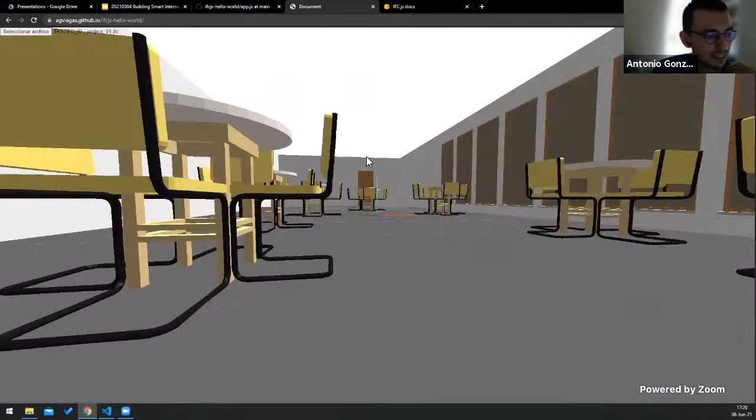We can see how this application looks if we go here in GitHub and click here, you will see this is how it looks. Obviously this is super simple because in 100 lines you don't have a lot of space to create menus and so on. But if I select a file here and open, say, a simple file, you will see that it loads super fast and we are able to see all the geometry.

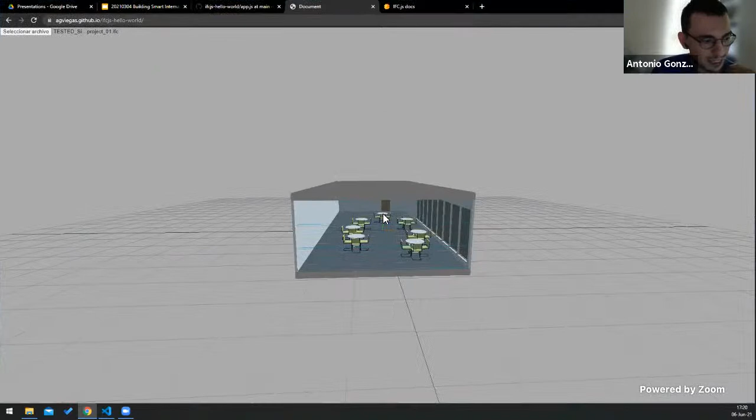Later I will show you how to access the data of all the elements we are loading. But this is fully working in Google Chrome. Right now I have made Google Chrome a BIM application, like Revit or BIM Vision or anything, and you can change this, you can adapt this. You can take this 3D view and put it in your page, show that to your clients, or use this to build your own platform that has a 3D viewer. And this is what it takes, only less than 100 lines of code.

If you take a look at this code, you'll see it's a super simple code. It's using Three.js, which is another JavaScript library a lot of people use to create 3D worlds in the browser. It's simply something you can use and have 3D right away without having to worry about the low-level details of building 3D in the browser. You can create 3D without this, but it would take thousands of lines of code. Using this is super simple.

If we take a look at the code here, you'll see the only thing I'm doing is importing Three.js here, a couple of objects. I am importing the controls, which is the object I use to move around the scene. And I am importing the IFC loader.

One thing to bear in mind is that IFC.js—we have merged IFC.js with Three.js so that now we are part of the Three.js library. This doesn't mean we only work with Three.js. You can use IFC.js separately. If you have your own 3D engine, you can use the core separately. But because we have the code, we have given that to them, so now you can use IFC.js directly inside Three.js. This is simply an implementation detail, but keep in mind that we are part of Three.js as well.

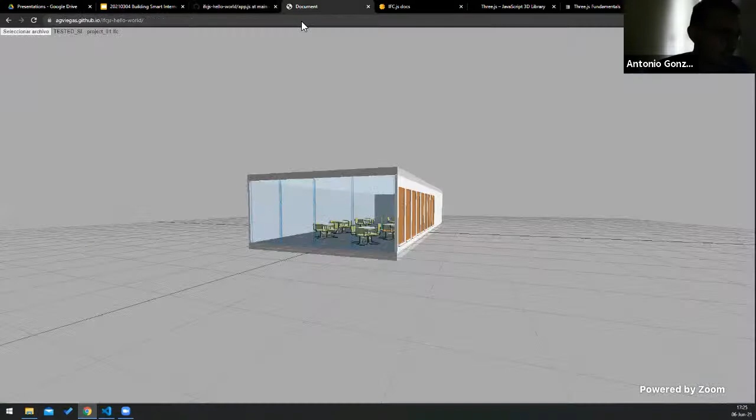I create an input element, a simple HTML input element, and I add an event listener so that when I upload a file, I create the URL object of that file, and I load that inside the scene with scene.add geometry. And this is it. With only or less than 100 lines of code, you can have a fully functional 3D viewer that shows your building.

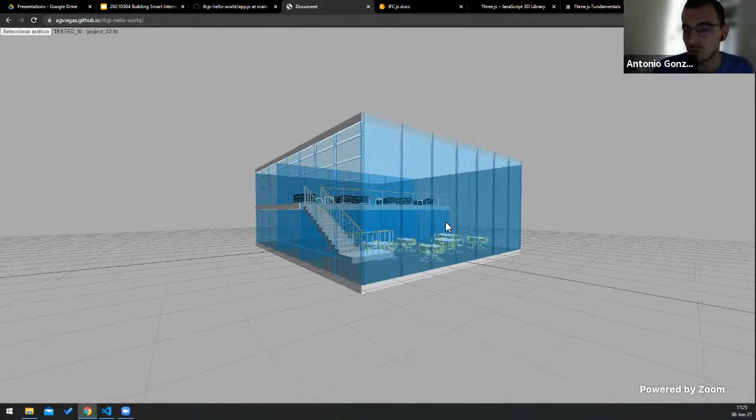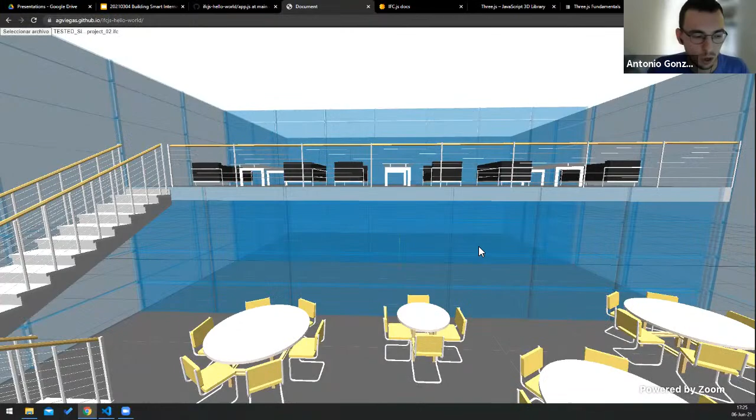And obviously, you can load any file you like. We are working to make this compliant with the whole IFC schema. There's still work to do. I won't lie to you, this is a project that has been going on for some months. I think the birth of this project was in 2020. So it's super young, super new, but we are super happy with the progress because we are able to load a lot of files. And even big files, and still have 60 FPS, which means this is also valid for applications where you need to load bigger IFC files.

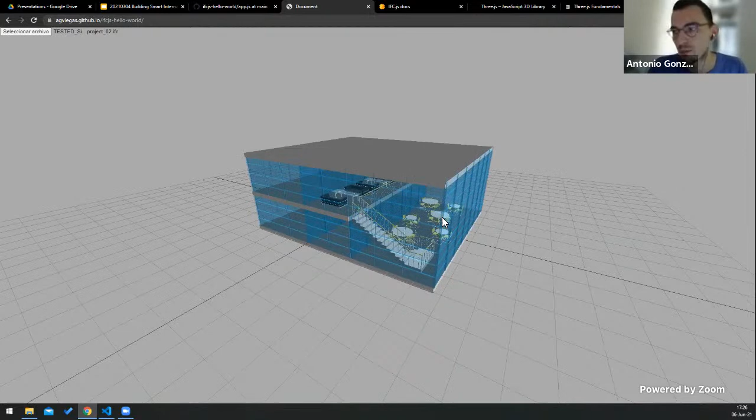And up to that point, you might be wondering, okay, you're able to load the models, but I want to access the information or the data, because BIM is model, but also information. And again, because this is something so new, this is something I did, I think, last week. So it hasn't been committed yet to the library.

You can find that if you go to GitHub, and go to web IFC. Yeah, web-ifc-three. This repository contains the IFC loader for Three.js, and here you will find the latest changes that we make. The problem is that every time we make a change, it takes 1 month or so, at least some weeks, for Three.js to reflect that change.

So if you follow the tutorial that we have and try to make what I'm going to make right now, it might not work. But the reason for that is that if you go to Three.js, and go to pull requests, and then closed, let's see, yeah, here you see that this has been recently merged. And this means that it will go out in the next version, but it's not there yet.

Just in case you try to follow the tutorial and say, hey, it's not working for me, the property showing and everything I'm going to show now, because it's super new.

So yeah, here in this folder, but the code that I have here, actually I can show you that. Let me delete that, and show you. Imagine that you want to replicate what I'm going to show you now. Like, hey, I want to see that as well. Let me try that again. I mean, imagine that you want to try IFC.js.

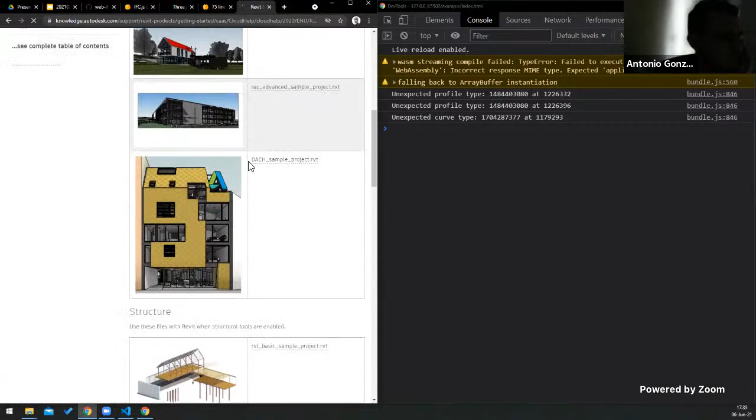If you go to Revit sample project, you can get this building here. You can download that building and export it to IFC. This is the building I will be showing now.

And yeah, it's here. And here we have functionalities to be able to see the properties of elements and also to access the whole structure of the IFC.

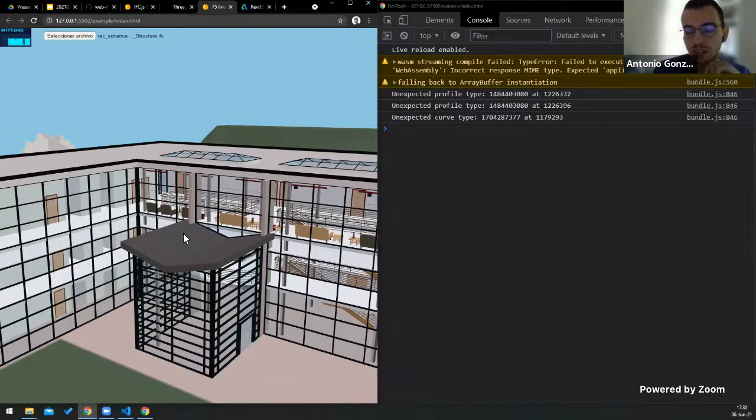So if I double click on something, in this case I was testing logic to make things transparent. So this is the reason why this is getting blue and transparent. But this is something you can customize however you want. You can make this opaque and red, or transparent and green, whatever you like.

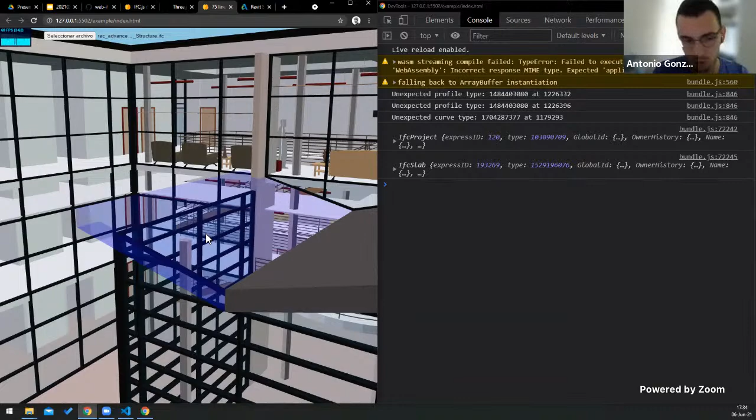And here, notice that in the code, I am showing two things in the console: the properties and the structure of the project. Every time I click on something, I will log on the console the IFC project and the properties. So let's see how that looks.

If I magnify it, you see that here we have the project. And if I open this, you see all the properties of the project.

And not only that, you also see that IFCs have the IFC project, then they have the IFC site. And here you have the IFC site. Again, I can go below the level and I can go to the IFC building entity. And here we have 1, 2, 3, 4, 5 building storeys. And each storey has the children of the objects it contains, like the ground floor.

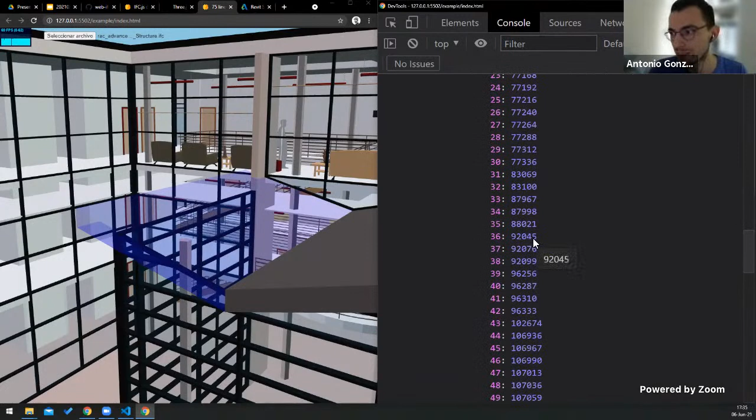For example, this is the entry level. It has certain objects, which are these objects, and these are the IDs of the objects. And I can access the properties of these objects if I want to, because again, this is one line of code, get spatial structure, and all this information is given here.

Or the properties, get item properties. If I see the properties here, in this case it's an IFC slab. And here we don't only get the direct properties, we also get the property sets, the types, and the indirect properties. In this case, get item properties, comma, all true. If the second argument is true, it means I will also get the property sets of the element.

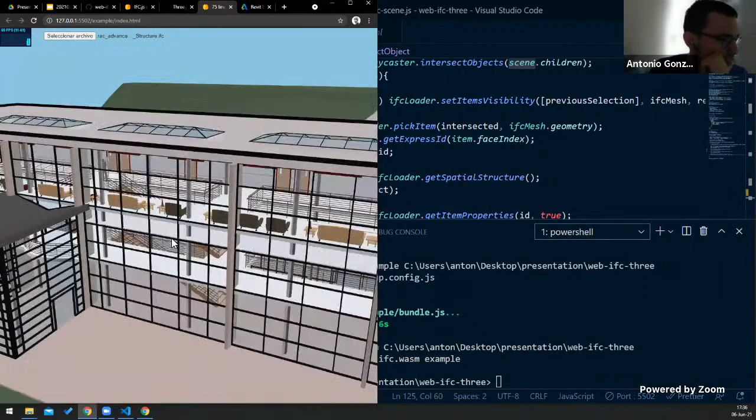Let's update that. Again, it shouldn't take much because it's not a lot of code. But if we go back here and I reload the same building I was showing you before, we should be able to go to an element. It can be any element, like for example, let's take this thing.

I've taken that. In the console we see IFC railing, and again here you see that we have two property sets. I can get into those property sets and see, if you have 100 property sets with the quantity data of the object or the material or whatever, you get that information here.

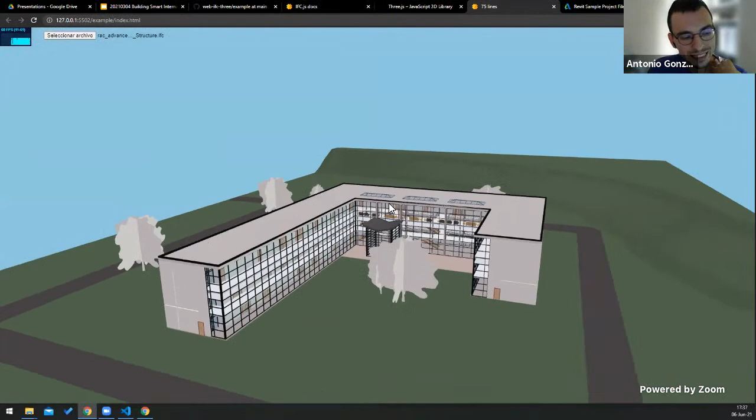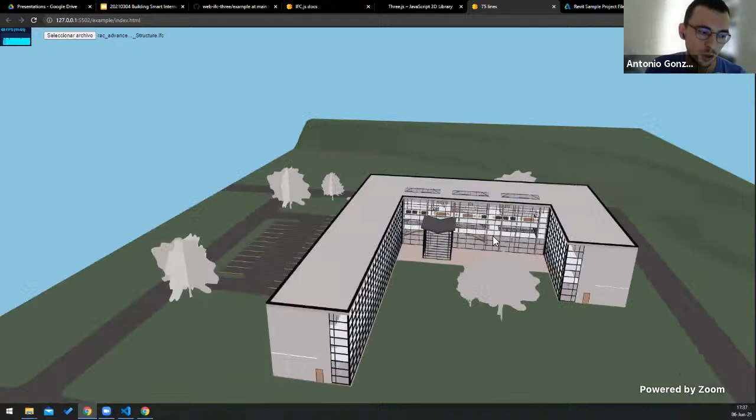Obviously, the point of all of this is not this application, because if you take a look at this, it's super simple. But the point is that if tomorrow you want to develop a BIM viewer in your platform or on your web, or if you want to start a new BIM application — imagine you're an expert in structures or whatever, and you realize you have the knowledge to build a useful BIM application, you can do that. You don't have to worry about the 3D or the IFC, because using IFC.js you get both things right away, and you can only focus on what adds value to your business.

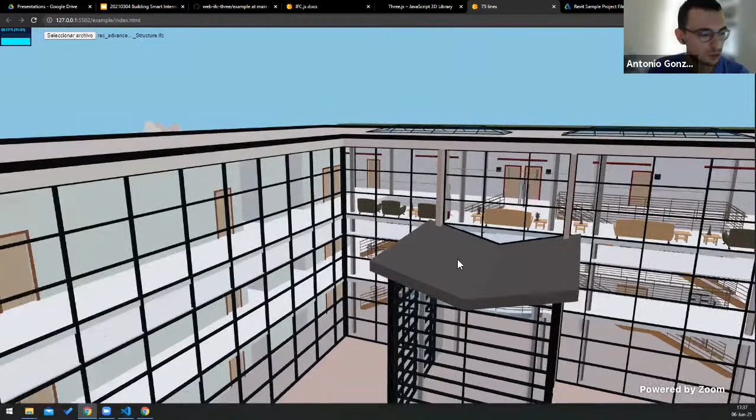Again, it's super new, so you might find some errors. Perhaps we think it's pretty robust, but you may come across errors. In this case, we also have a Discord channel where we are super active. We speak every day in the Discord channel, and usually when someone has a problem, we try to solve it the same day. So we are an active community, and in my opinion, we are nice to people.

I think this will probably change, or hopefully change, the BIM market, because right now if you take a look at the BIM ecosystem, you usually only see bigger players, or at least players that have a relatively big size — you probably need at least 1 or 2 million a year to construct a company able to develop BIM applications. But using this library, anyone can do that. In one afternoon, you sit down and you have your custom BIM application that you can have in the browser. And by the way, I'm always talking about the browser, but this is not only for browsers.

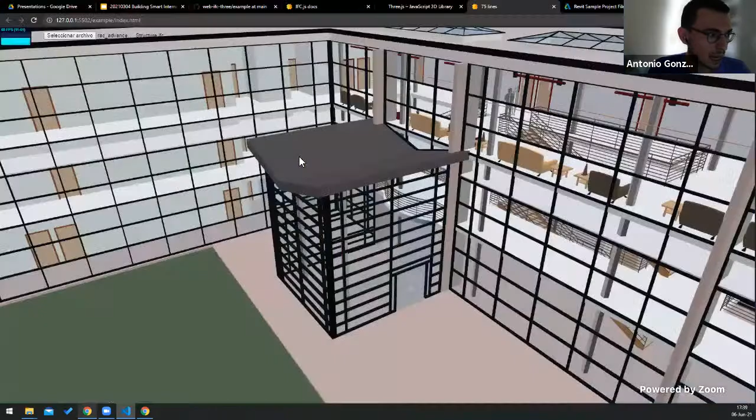If you write in Google IFC.js docs, you will see this page, and this page is the documentation we're building. It's super small for now because we haven't had the time to build this further, but if you go to intro, you'll be able to see more or less what I'm telling you right now.

If you go down, you will see that this library can be used in different environments, because JavaScript is a language that can be executed literally anywhere. You can use it for the web, like I'm showing here, or perhaps you want to use it on the server. If you use Node.js, you can build server applications using this technology.

And obviously, the next thing we want to do is put this inside a Docker container, and perhaps in the future, even for Kubernetes, it's something interesting to have.

Also, you can build desktop applications with this library, because maybe you know Electron. Electron is a framework you can use to build desktop applications for Windows, Linux, and Mac, just using JavaScript, HTML, and CSS. This means the same thing I have here, you can have as a desktop application that you distribute and sell to your clients.

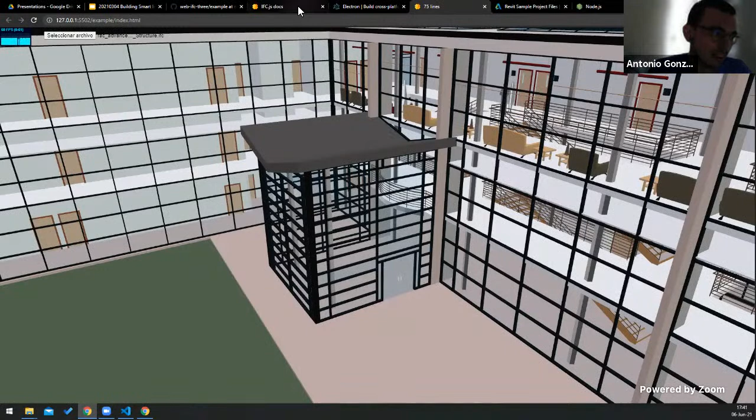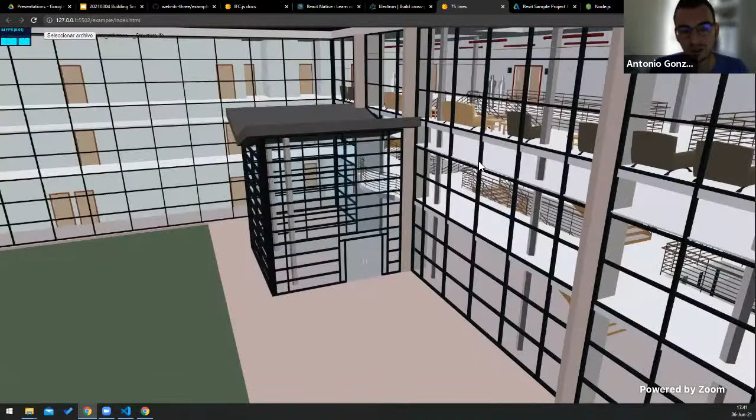Finally, you can also build mobile applications, because if you are familiar with React Native, you can use JavaScript, CSS, and HTML to build applications for mobiles, both Android and iOS, and also tablets. So the conclusion is you can have this wherever you want, like if you want to build an iPad application, a BIM iPad application, to bring this to a building site or do something, you can do that.

Regarding the architecture of the project, right now we are trying to keep things organized, even though we are aware we will need to put more effort into this. But right now we have 4 repositories.

Web IFC, this is where the magic happens. This is written in C++, and we compile that with WebAssembly so it can be executed inside browsers. This is something you don't need to use, because it's super complex and not developer friendly. So this is the engine. Feel free to come into this repository and use it, but probably in your use case, you don't need to.

Then we have Web IFC Three, which is this thing I'm showing here. This is the repository that is the IFC loader for Three.js. Here we take the engine and make a bridge with Three.js so you can see the 3D and so on.

Then we have one last repository, which is Web IFC Viewer. Here, because we are aware that each person wants to develop a different BIM application, but in a lot of cases these BIM applications have common functionality, instead of letting the user write the same code over and over again individually, we have that code here.

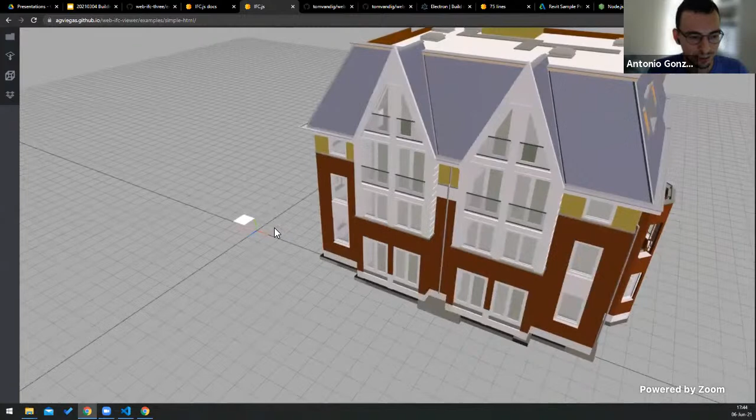By the way, I've noticed that sometimes when sharing my screen in the stream, you see some lag, but this is completely 60 FPS. If you see lag in the viewport right now, it's because of the streaming, not because of the library. I realized this when watching recordings of other interviews we did.

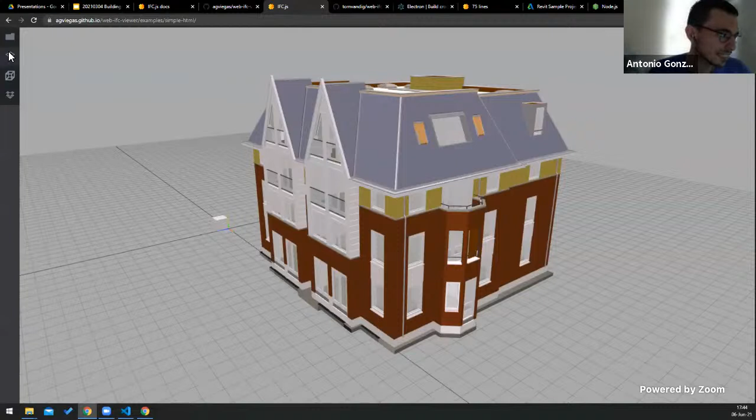Imagine you want to develop clipping planes. If you use Web IFC Viewer, you have the viewer and also tools you can use in your application right away. For example, here we have a tool that is clipping planes. If I click here and double click here, you see I create a clipping plane that I can use to make something like that. And even on sloped surfaces, we can do that. So this kind of cool stuff is something we are developing.

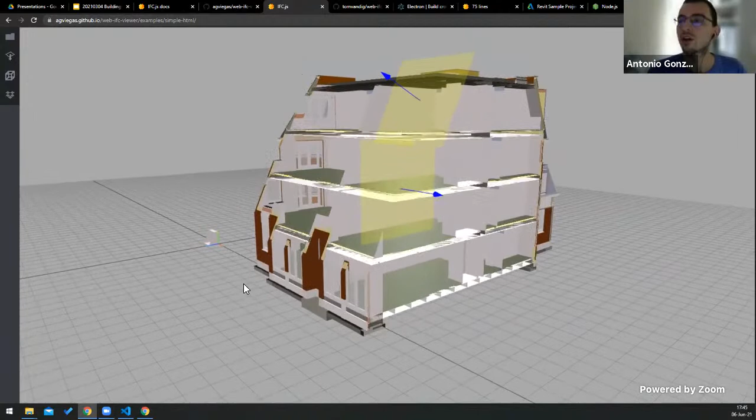So if tomorrow one person not familiar with BIM applications wants to start developing one, they can do that, and they even have tools to populate the toolbar. You don't have to build everything from scratch. You already have everything you need to build your application, and just focus on your specific functionality or use case.

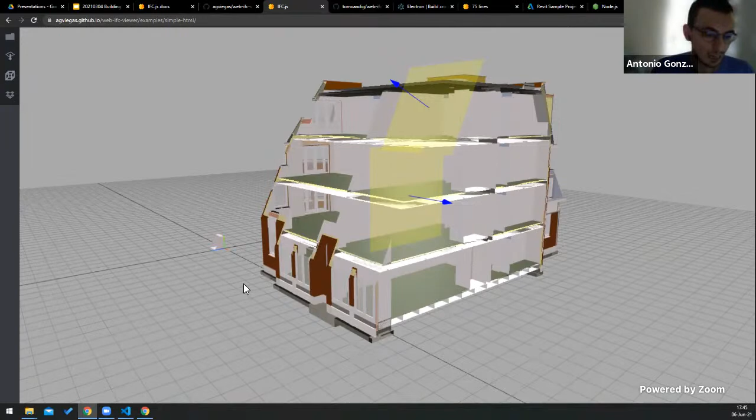So, finally we have one last repository that makes this compatible with Babylon.js. Babylon.js is an alternative to Three.js, another 3D library. It's just like we have Mac, Linux, and Windows - in 3D you have Three.js and Babylon.js. It's an alternative, and we are also compatible with this library, just saying.

And yeah, that's more or less in a super quick way how things are going and what this project is. So perhaps you have some questions, or anyone has questions.

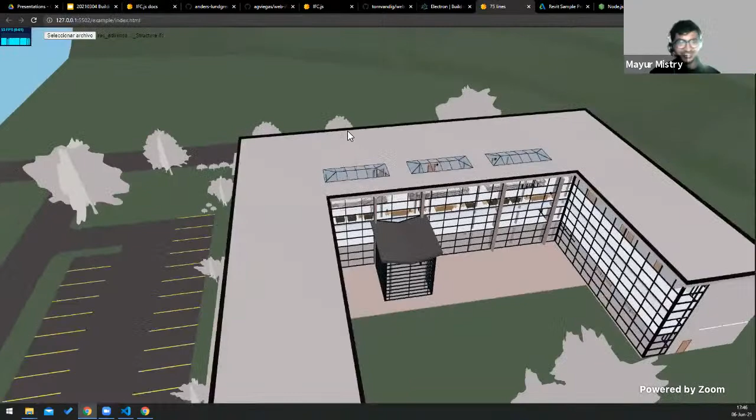Yeah, I think there's a lot of stuff to absorb, and I really liked the whole functionality and the advantages of using this library and workflow. Since you're already sharing the screen, I'm curious - the model is able to read high level architecture, like properties of various elements. Can you briefly show us how you have defined those functions in IFC loader?

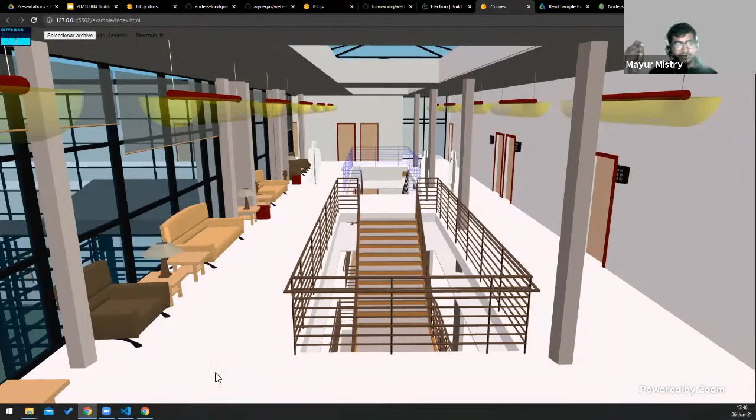So there was one function, let's say, get item properties. How was it written? Yeah, let me show it now.

We are documenting this right now, so if you wait one week, you will find a lot more information than you find today. So if anyone is curious about this, I suggest you wait.

In this file, we have the definition of the API in IFCLoader.d.ts in web-ifc-three. In this file, you will see the functions that we have - you'll see we don't have many functions, only these. But I think this is a good thing, because it means the library is easy to use. You don't have to pay $1,000 to get a master's degree on how to use this library - you can just download it and start using it right away.

This is for getting, for example, the ID of the element. But the two functions you're probably talking about are these. Get item properties is what we use to get the properties of the elements, and here you have different arguments. This is the ID - something you have to give to specify the element you want to find the properties about. 'All' means you don't only get the native properties, you also get the property sets and the type and other indirect properties, because in IFC you find two kinds of properties: the native properties and the property sets that can be defined by the user. If 'all' is true, you get this property set too.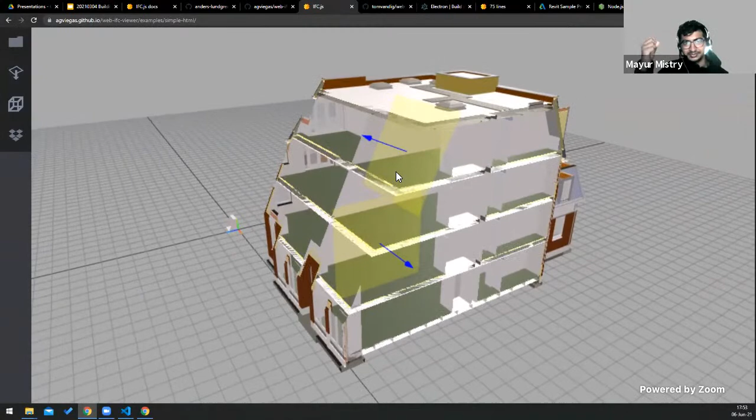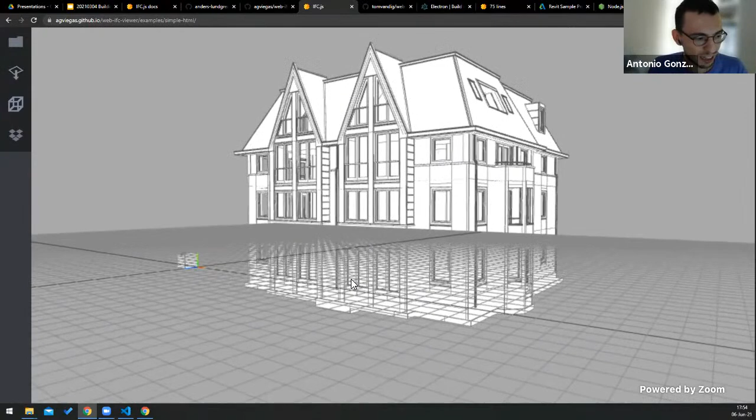Yeah, exactly. Because we are using Three.js, you can do anything you want. For example, here we also have something — this is super not finished, okay? We developed a tool that's able to... we have to correct because the grid is rendering on top of this. But we created a tool that can render this as an edge, like when you see in Revit those lines and so on. And this can be done in less than 75 lines of code. So using Three.js lets you do super cool stuff very easily without a lot of code.

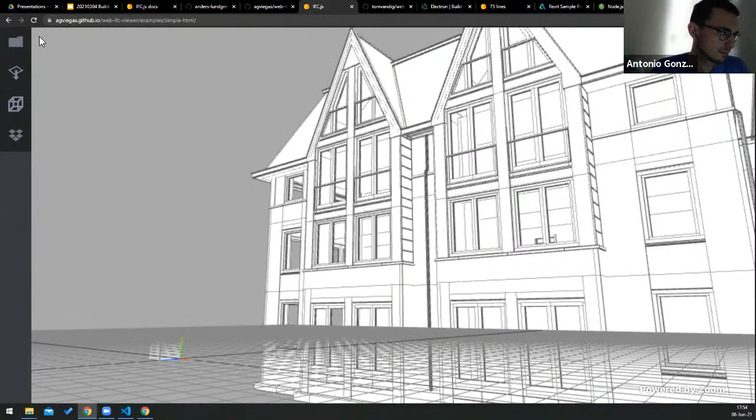We have two questions on the chat, I'll ask those, but I have one thing I was curious about. So we are taking material properties from IFC and rendering it in Three.js using, I guess, WebGL. What if there are some material properties in IFC which are not Three.js compatible?

That's never the case, because usually when we talk about materials in IFC, you have red, green, blue, and transparency, and that's it. I think IFC doesn't support textures yet, and you usually don't have more than that. Materials are something super easy that we haven't encountered any problem with yet. I was thinking in terms of texture because people do a lot of custom texture in Revit. Yeah, if I'm right, I think IFC doesn't support textures yet because you don't have UV coordinates or anything like that.

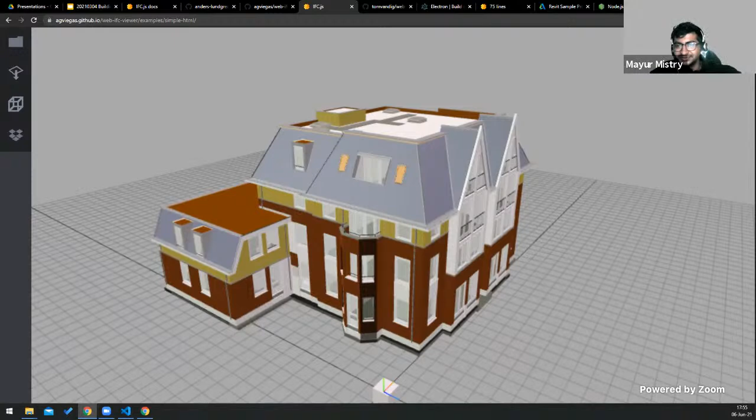So the question from Sujay is: is it possible to save the IFC file on the cloud and share a link of the viewer with the model loaded in it? Is it possible — actually, if you go to Google and search 'Three.js IFC', you will see the example that we provided to Three.js to show the loader.

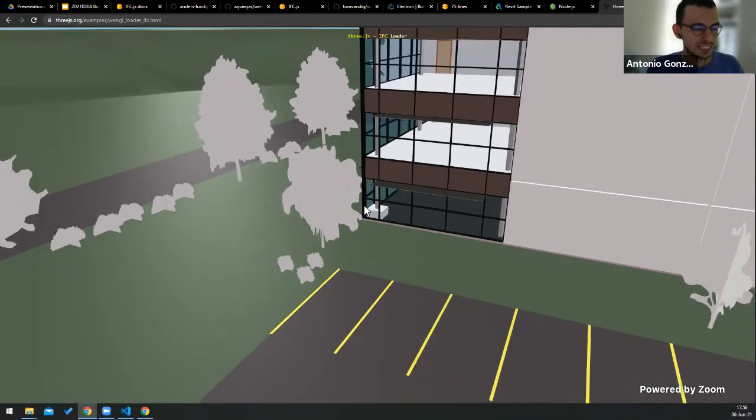If you open that example and wait for some time - and this is an old version, they'll hopefully release the new version this week. I think because this is something they touch, it takes a little bit to load. I'm not fully aware why we have to wait a bit, but you can have a web with the model right away.

When the user opens the web, it has the model there. It's super easy because the only difference is that here I am using an HTML input element to load the model. But you can have the model in your code or in the cloud.

Let me show you another thing we developed a short time ago: this Dropbox integration. This means you can have models in Dropbox, and perhaps in the future we'll also do an integration with Google Drive or whatever.

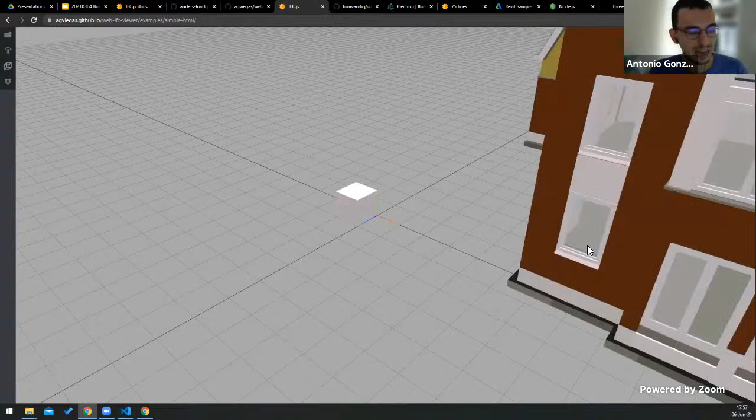Let's load this one. What should happen is that it fetches my data in Dropbox directly, which is IFC, no intermediate format or anything. It downloads that data, and once downloaded, loads it into the scene. So you can build a custom solution, with your data in Google Drive, Dropbox, or Google Cloud Platform, and build a full common data environment using this library to display the data you have.

So basically all the compute is done locally, right? Yes, when you use IFC.js in the browser, everything is done by the browser. But you can also do that in the backend if you like, because you can use JavaScript in the backend.

By the way, I'm aware that Harry, one of the other two developers working with me, managed to put IFC.js inside AWS Lambda, which is the managed service for Amazon Web Services. That means the server renders the thing, and the client doesn't have to do anything. So you can also build these kinds of solutions.

And how does that work for mobile applications, since the compute on phones would be much less? Again, for small IFCs, we've found mobile phones are capable, though it depends if you're talking about tablets or just phones. Tablets are actually quite capable of parsing and showing up to middle-sized IFC files.

When it comes to smaller or older devices, you can do what I just told you: build in Amazon Web Services, Google Cloud Platform, or even DigitalOcean - these cloud computing services. You can put IFC.js there, compute the things there, and send the result to the client, so the mobile phone doesn't have to do anything at all.

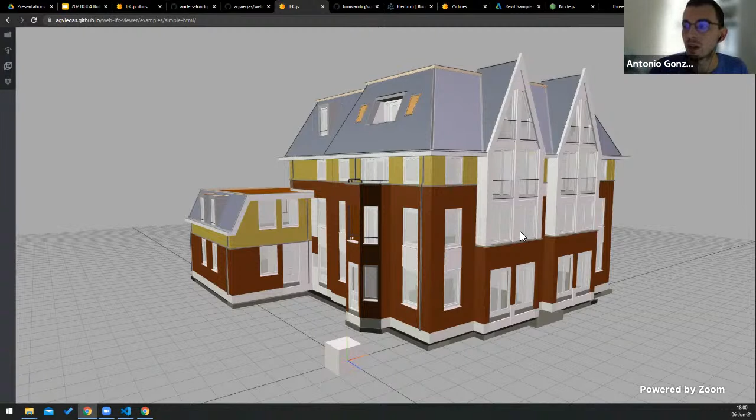Can I do it in the Chrome inspect element, or do I need to go to the IFC file to do it? No, obviously what I'm showing you here is just for showing the functionality, but it's the same thing - perhaps this isn't clear.

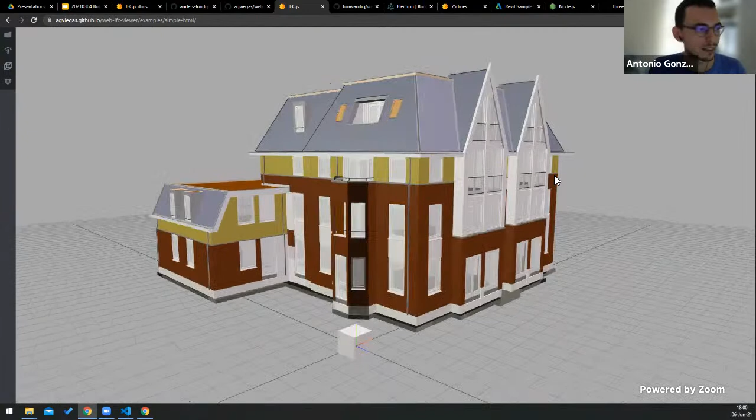Here I am showing the properties. This error is because I opened the open file and then closed that, okay? This is just because of that.

These properties I am displaying in Chrome Developer Tools. You can build HTML and CSS menus and display that as if it was a full BIM application. You don't rely on this. You can create your own BIM application that works in the browser and allows users to see all the properties and then go to a property and override it. We don't have examples for that yet because we're only 3 people and this is a big project.

And we have a question from Leonardo. What version of IFC.js, like which IFC version, are you working with right now? We use the Express definition file released by Building Smart to create the schema, because we are not implementing the schema by hand. So we are compatible both with IFC4 and IFC 2x3. So yeah, 99% of the IFCs, we're compatible with them.

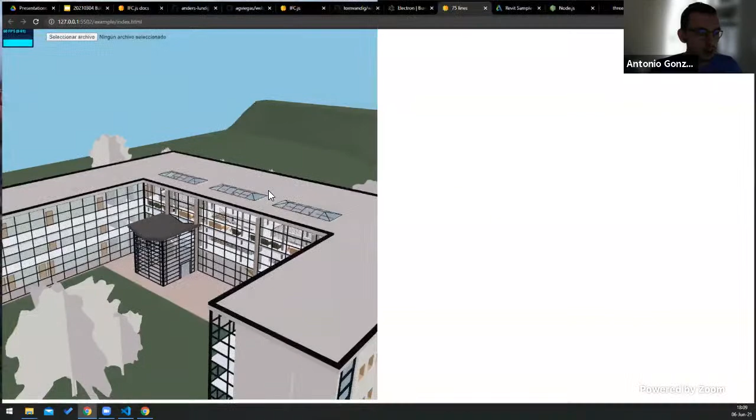Yeah, really, here we are only talking about JavaScript data or JSON, however you want to call it. What can you do with JSON? You can do whatever. I can take a whole IFC and put that in a database if I want, and this is super easy. Or I can take Rhino and make an integration, or the Revit API and make an integration using HTTP requests and responses. So you can use that for whatever you want, because obviously here you are seeing the geometry and this is super amazing, but remember that you also have access to reading and writing all the data. And this gives you power to build whatever you want.

Okay, I think those are the questions we have in the chat. On YouTube, there is one question: how do you use IFC.js without using three.js? Meaning, like IFC.js as an engine in the backend.

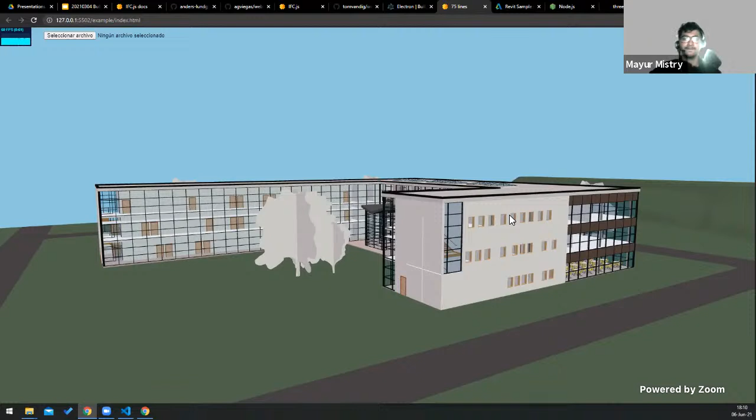Yeah, for that you would need to go to Web IFC and use that directly. Nevertheless, keep in mind that even for using this in the backend, you can execute three.js in the backend and render the scene there, and then send the result. We will make an example about how this works. If you ask me how can I use this without three.js...

My answer is, okay, perhaps you don't like three.js for some reason - we are also compatible with Babylon.js. That's one scenario, and you can use the Babylon version, which is exactly the same. Another scenario, perhaps you want to build a desktop application - in this case you can use Electron, which is super easy to use. The third scenario is you want to build a desktop application that uses OpenGL, and this is super hard. This is by no means something easy.

In this case, you have to go to WebIFC and download this code. We don't have any examples on this, and honestly, we haven't tried that. This is obviously compatible with any desktop application because it's just C++, which you can normally compile. My answer is give it a try and ask in the Discord channel so we can help you with that. We are not coupled to three.js; you can use that separately.

One example of that, maybe you're familiar with XeoKit? XeoKit is a tool that a lot of people use to view IFC files in the browser. I think in one of the versions he's now using WebIFC directly, using this repository directly to be able to read and write IFC files. So this is one example of a person who took this repository and used it right away, instead of using the adapted or easier versions.